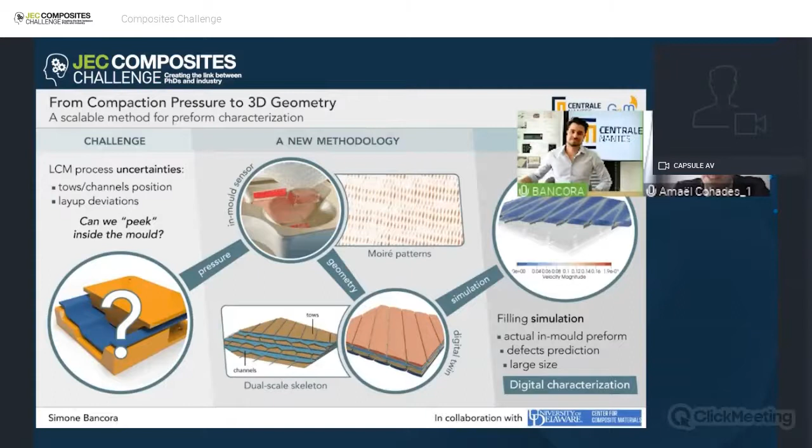Let me just thank my advisors, Professors Binetruy, Advani and Comas, as well as all the people at the École Centrale for the support through this journey. Thank you. Thank you very much, Simone. Do we have some questions from the jury? Please.

Very nice presentation. Thanks a lot. Did I understand right? If you've got several layers of textiles, between every layer there has to be one pressure-sensitive film to detect the orientation of the fibers? This is the first question. Second question: if, for instance, you have an RTM process, you know that by injection of resin, sometimes the fibers will show some deviation. Does your pressure film resist RTM processes?

Excellent questions. Thank you very much. I will answer right away. So for the first question, the way this technique works actually is you just need to place one layer of this pressure-sensitive film either below your preform or on top of it, just one layer. And the interaction of all the layers on top, so you don't need to put it in between the layers, actually exhibits some patterns because there is some interference in the thickness of the different layers, which behaves in a similar way to the interference of gratings in Moiré theory. So just one film is enough.

And of course, you're going to have a limitation in number of layers, but I've been able to push it up to 9 layers without any difficulty. So yeah, this is the way it's meant to be used. Regarding the second question, this technique has been only used to characterize a dry preform. So in your preforming phase, you can place this film, and then when you retrieve your preform, you have the information to reconstruct its architecture. But it has not been tested in the context of my thesis.

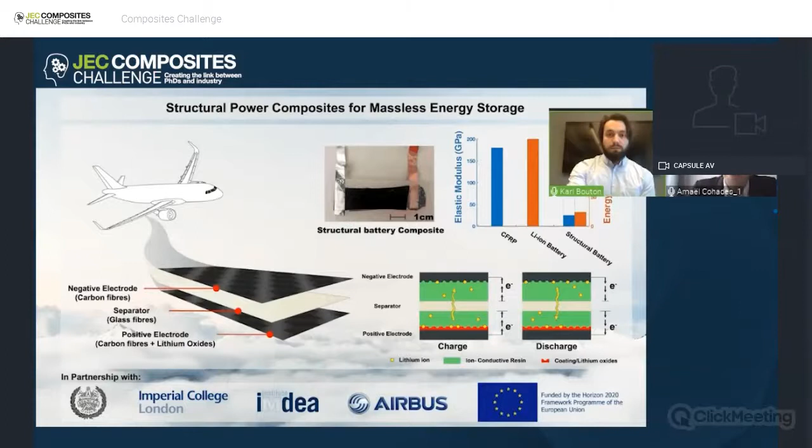Hello, everybody. Thank you for your very clear presentation. Interesting, and I like the energy storage, and it's very interesting to combine the structural part with the battery. It's a dream I have as well. I have two questions, very simple questions for today. One question is on the battery. Do you measure the number of charges and discharges you are able to apply in your concept today?

Yes. If you're talking about the discharge rate, I mean, these batteries are mostly made to work with a discharge rate of 10 hours. But by modifying the battery chemistry, you could work on a shorter discharge rate, like an hour, and then this battery can serve for hundreds, thousands of discharge cycles. So yeah, it's a matter of chemistry and some work to be done on the chemistry side.

Yes. Very quickly, second question, if I may, is the properties. You mentioned you use an ion-conductive resin, if I understood well. What are the properties of this resin? Is it a brittle or ductile resin? Can you repeat, please? Is it a fragile resin? I would say, is it a ductile resin or brittle resin? It's not brittle, it's more like a ductile resin.

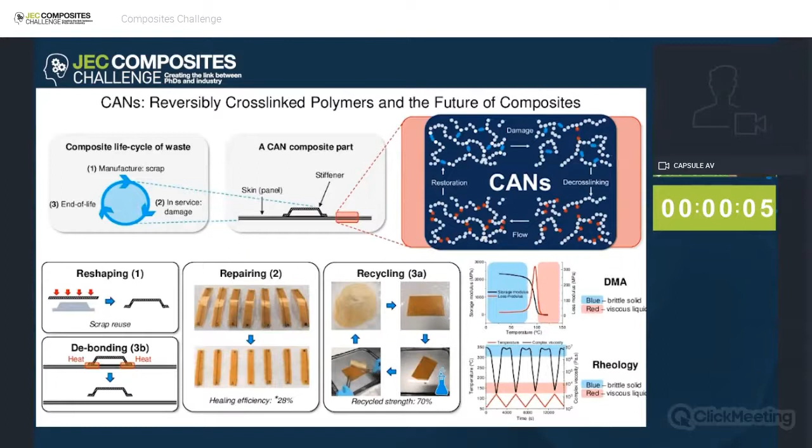And finally, 3B at the far bottom of the slide, you can also improve end of life by using these polymers as reversible adhesives. So with that, hopefully I've convinced you that CANs are quite interesting new materials, and hopefully we'll be working together to make more sustainable composites from them in the future. Thank you.

Thank you very much, Callum, for this really nice talk. Do we have some questions from the jury? Yes, we have. Hello, Callum. Thank you for this really nice presentation.

I have a question concerning the processing of those composites, because the viscosity seems to be very high when you melt it from what you showed. So can this be processed by liquid composite molding, or do you need to use press forming techniques? You need to use press forming with the CANs that I've developed at the moment, the ones I showed you. I treat them as powders and then compression mold them essentially, high temperature and high pressure. But it works quite nicely.

Okay, thank you. You're welcome. Great, thank you very much, Callum, again, and congratulations. And now, please welcome the next candidate, Kelly Chang from University of Illinois at Urbana-Champaign in the US. Kelly is passionate about sailing, which gave her the wish to study multifunctional composites through a PhD. The title of her talk today is Autonomous Healing and Indication of Cracks in Fiber Reinforced Composites. Kelly, are you ready? Yeah, let's do it. Okay, great. So 3, 2, 1, and go.

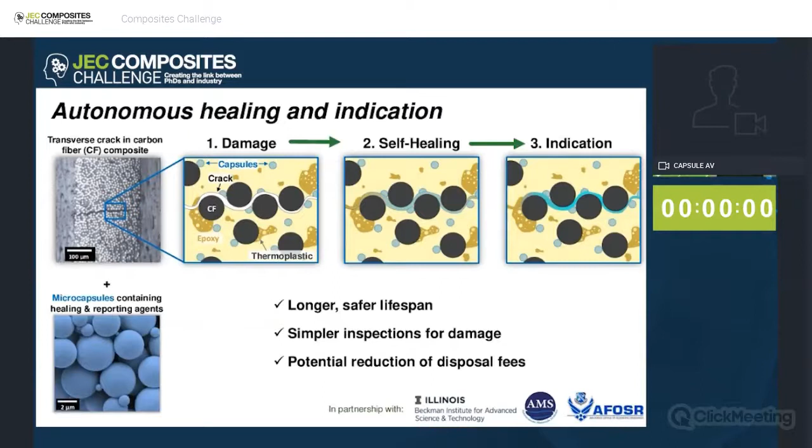Only one question. You have got unique thermoplastic modified epoxies for thermosets for this healing process. How much is the content of this thermoplastic? Because this is very necessary to reach every point which could be a crack. Yes. So right now we're using a 20 weight percent formulation, and that's enough. Thanks.

Christophe? Yeah, very quick question. Thank you for your talk. About the dye you introduced in the material, is it visible from outside the composite materials, or do you need a special device to see it? So it's UV activated, so you need UV light to penetrate the material in order to activate the fluorescence, and so by that nature, it's visible on the surface only. On the surface only. Yeah. Thanks. Great, thanks a lot.

Let's take the third question. Quick one. Yes, hello. Thank you for your great presentation, and I know the self-healing as well. I like this story. One question: do you know the speed of the self-healing you have in your composite? So far we've not been able to characterize it at the small scale that I'm looking at specifically, but my group has demonstrated self-healing in just 2 days, which is really promising for this technology. Okay, thank you. Really great. Thanks a lot. And we look forward to seeing the next step of this research.

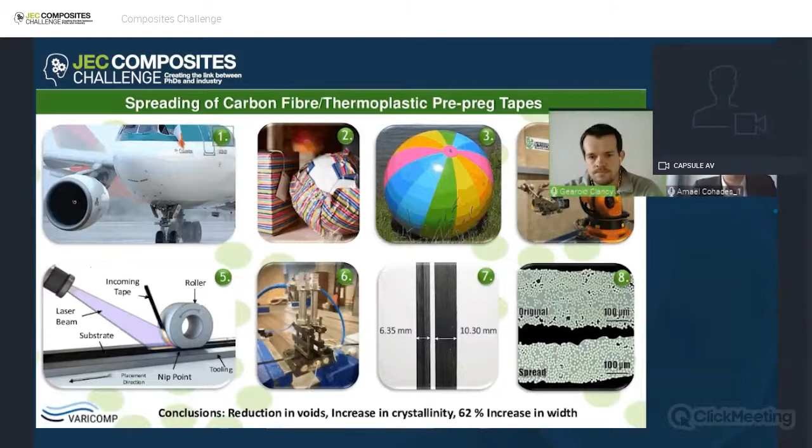Yes, thank you very much for your talk. I have a quick question about having this device introduced in the head of the fiber placement machine. What is the maximum velocity you can reach? Because if I understood clearly, you have to squeeze the material before laying down. So I think it takes some time. Am I correct? Yes. So the speed would not be the same as you can achieve without this device.

We're talking at 3 meters a minute, because once you go above that, with our current method there's friction on the surface and it makes it difficult to control the heat then. So 3 meters a minute. Yeah. Thanks. Thank you very much.

Let's go for the second question. Hello, do you hear me? Yes. Okay, thank you.

Just a question regarding the properties that you may have between the spread and unspread materials. What at the end have you been able to achieve? Are you keeping the same performances, or do you have any reduction due to the fiber distortion? Yes, so in terms of the volume, we're keeping the same volume within the tape. I will admit it is currently early stages. Let's say the consistency of the width is probably not as good as the consistency of an as received tape, but we are working on this. It is close, but it's not perfect at the moment.

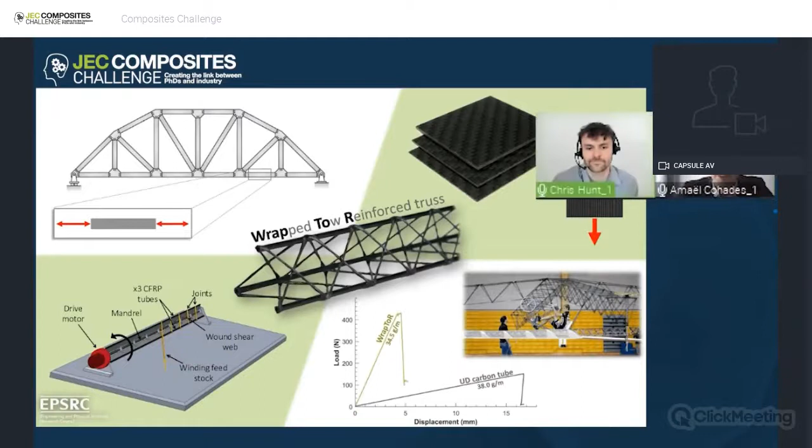I would like to know, for this type of structure, what about, for example, the complex loading conditions? So, for example, if you combine a bit of bending with torsion, have you already studied that with your new technology? No, so I haven't done any experimental combined loading. We have looked at it in the analysis. Most of the loading scenarios we've looked at have been bending, but we're also starting to look at compression now. So those are the two main ones that we think will be most useful, bending and compression. Okay, thanks.

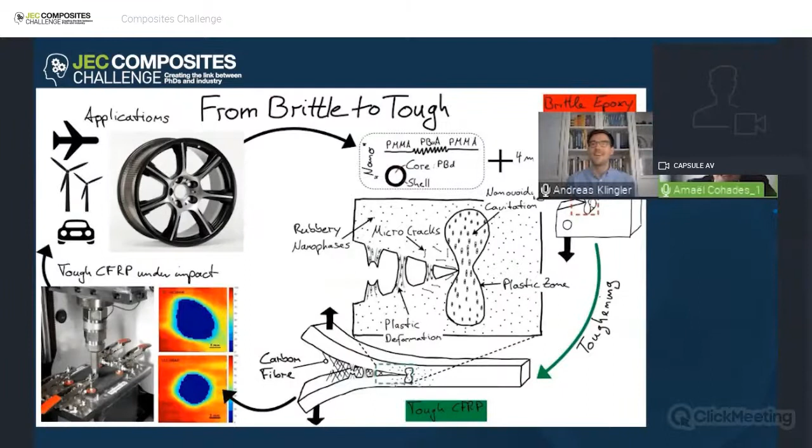Hello, and thank you for your presentation. Very interesting concept. I have one question regarding the viscosity of the resin. What is the impact on the viscosity of the resin if you add this kind of block copolymers to the resin?

So if you go to this very high loading where we have this really strong reduction of the damage volume, you end up with a material you cannot really process in RTM and so on. I think it's about 30 Pascal seconds, if you talk about numbers. But for sure, lower concentrations will enable easy processing. This was more or less a gradual increase, and we already had very good results with lower concentrations in our material. Okay, thank you.

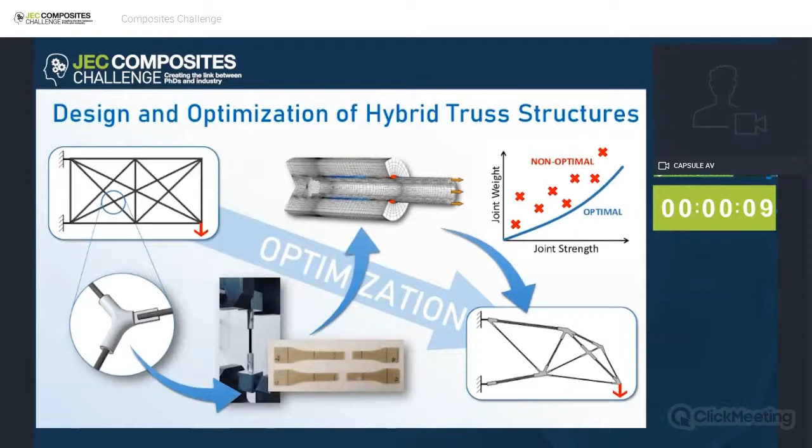Now, these results are obtained using one specific joint design, but maybe for different applications, different joint designs might be required. The point is that the joints are a critical aspect of a truss, especially when composites are involved. So by predicting their strength and involving them deeper in the design and the optimization processes, we can obtain better and lighter structures and eventually better and lighter aircraft, spacecrafts, and robots.

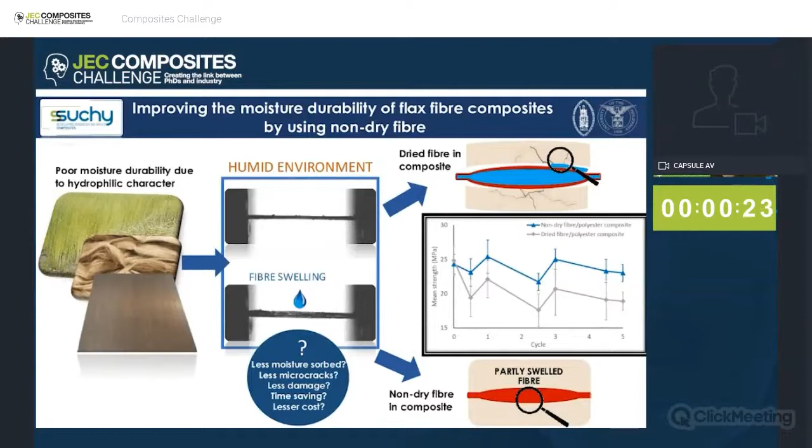I have a question. With this water which is absorbed by the flax fibers, what happens when you process a composite and expose these fibers to a temperature higher than 100 degrees C to, let's say, process a certain polymer? What happens to this water? Okay. We use epoxy, and the post-curing temperature of epoxy is around 150. So what we did was we used pressure. If you increase the pressure, you also increase the boiling temperature of water, so you limit the boiling of the water. So we actually made a good composite using this epoxy. Okay. Thanks. Thank you very much.

Let's go for the second question. Hello, and thank you for your interesting presentation and very engineering approach. It's very nice to consider this approach. My question is, do you consider or characterize the surface energy of the yarn? That means looking at the compatibility between the resin and the yarn if you use a dry fiber or a non-dry fiber.

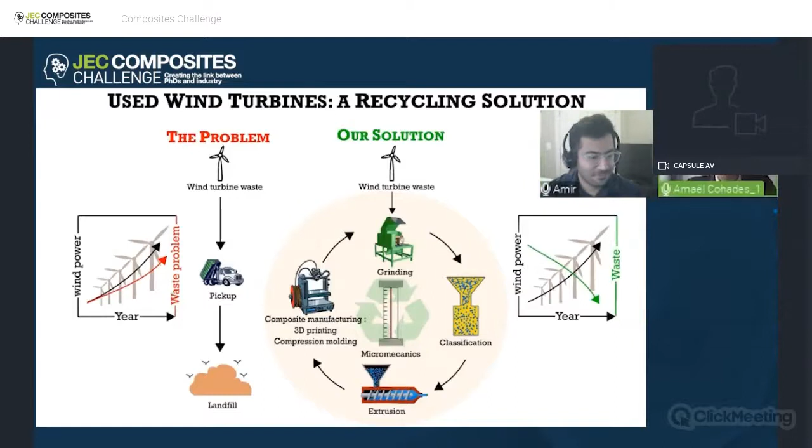Yes, thank you for this interesting presentation. I just have a question. What type of products do you plan to make with the recycled wind turbine blades? Certainly not wind turbine blades, I guess, because you have short fibers, but do you have any idea of specific products? So yeah, there are actually some products, some prototypes that we have manufactured.

But if I just want to give you one good example, recently we collaborated with Stelia Aerospace here in Montreal, and we had a contract with them, and we made a mold for them, because the properties that we found for our recycled parts, of course, can't be used for high-tech products, but the mold that they wanted to use, the properties that they wanted, matched the properties that we were able to obtain from our recycled parts.